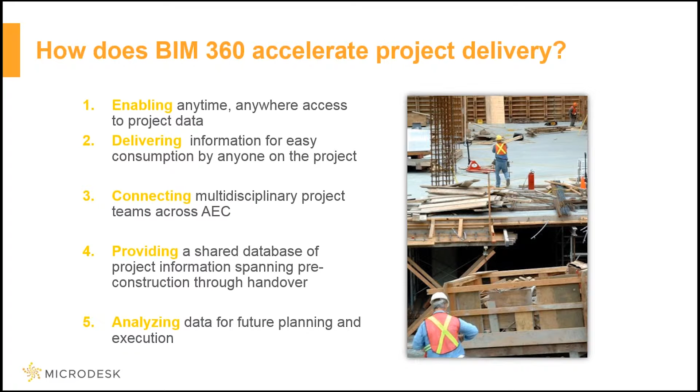It connects all the disciplines, as I just mentioned, as far as your GCs and CMs and so forth, that need to work under one shared platform, which gives you real-time updating and real-time access to the data within the project. It helps you from an analytical perspective because not only are you able to manage the entire construction process for your existing projects, but it also allows you to have that data for future reference. So if the project was successful in your eyes, there's no reason why you can't repeat those practices to help you with future projects.

And by you being able to have one platform in which you can access data, by having everyone access that information in a timely fashion, the real benefits of BIM 360 come from budget and cost. Because what you're going to be able to do is you're going to be able to maintain your budget because you're going to be able to maintain and decrease rework, if you will.

You're going to be able to maximize the uses of your resources, of course, people and equipment and so on, because you're going to be able to locate them in a timely fashion. You'll increase profitability because you're going to minimize overusage, if you will, as far as individuals having to go back and forth from the office and from the trailers.

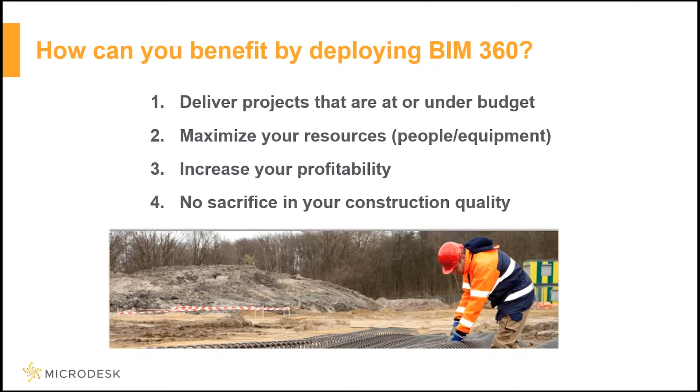Everything will be in real time, so you'll be able to make those decisions a lot more efficiently. And because you're going to be able to do that a lot more efficiently, you're going to increase the quality of your construction. You're not going to sacrifice any quality at all because you're going to be much more efficient in managing that.

So let's talk about risk for a moment, because really what it comes down to is minimizing and reducing risk because of the lack of efficiencies and the lack of connectivity, if you will, of all parties involved in managing that project. What BIM 360 will allow you to do, because of its platform and because of everyone being involved in the process, you are going to increase your capabilities of reducing time to delivery and reducing that risk tremendously.

You're going to have everyone on the same platform, so the reliability of your data is going to be sound. You're going to decrease the cost of your project because you're going to reduce your rework. You're going to reduce waste.

You're going to increase quality because you're going to be able to not only take that information from this project, but you'll also be able to take those practices for other projects moving from the present into the future. You're obviously going to reduce your time, and you're going to increase safety because of the real-time capabilities and real-time access and being able to understand what's really going on in the field.

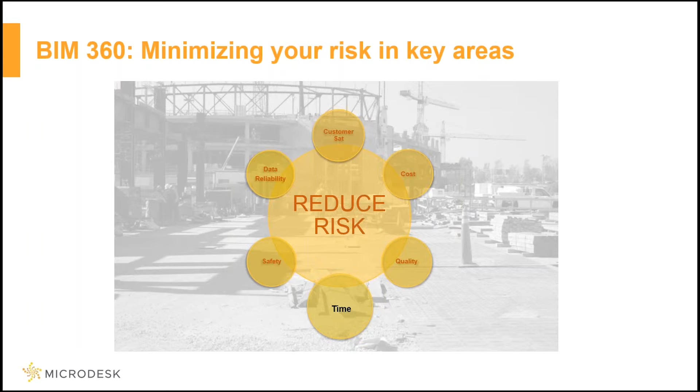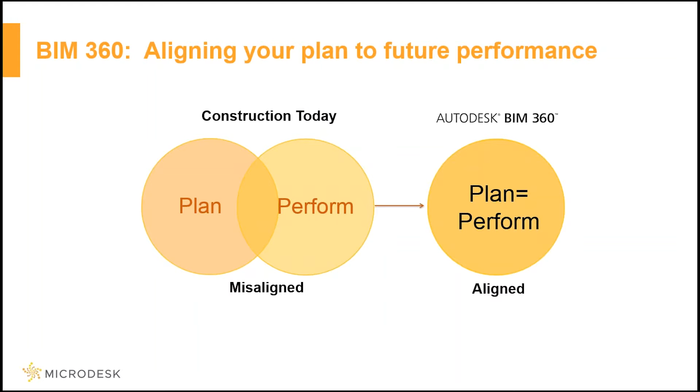So what BIM 360 does is it actually allows you, because of its platform, to take what's being planned versus what's actually happening in the field and help align those two major aspects, for a much higher quality product, a much more efficient usage of the budget, and of course maximizing your profit in completing that job.

And just to reiterate, the anytime, anywhere access of BIM 360, given the fact that it's a cloud-based solution, allows all participants to access via laptop or mobile device, depending on your modules, even an iPad. It gives you access to the data you need, delivered to the right person at the right time, without them having to search for what they need to be working on.

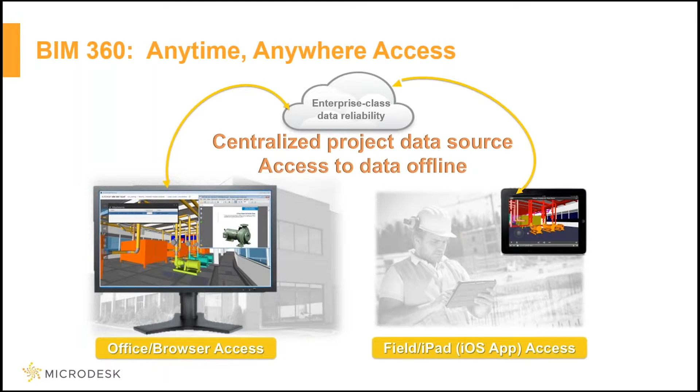So briefly, overall, BIM 360 spans the entire building life cycle, from pre-construction using BIM 360 Docs, our most recent module, allowing you to store and manage all 2D, 3D, and other documents involved within that project.

BIM 360 Glue, which we're going to focus on today, is our BIM management and collaboration module.

BIM 360 Plan pertains to production scheduling, lean scheduling for crews who need that 1 to 2 and 3 week look ahead, so they can be much more efficient in planning. BIM 360 Field helps you in measuring and managing all issues occurring in the field.

And then Building Ops, from a commissioning perspective. Once information is collected from the field and brought into Building Ops, your facilities managers or owners are able to manage that facility from day one.

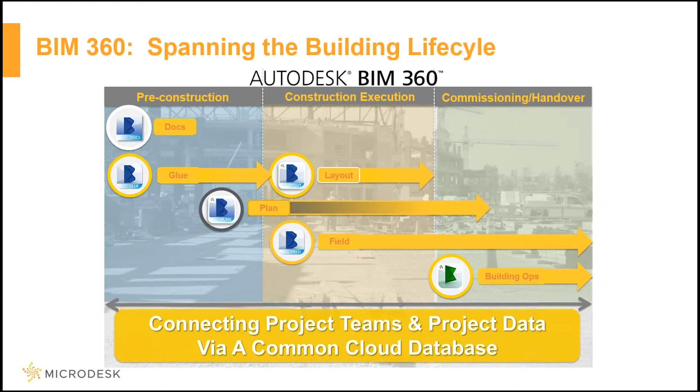So let's talk a little bit about BIM 360 Glue. I'll be quick here, and again we apologize for our late start. BIM 360 Glue is our module that helps you increase collaboration, communication, and clash detection, so everyone knows what models they need to work on, what are the most up-to-date models, and that collaborative issue of sharing files and emails going back and forth will go away using BIM 360 Glue.

Typically, in the coordination process, you have a BIM manager and your different MEP, design, and structural teams all coordinating with their models, trying to do clash detection, trying to merge models to curtail issues before building. The problem is that when you're not on a single platform, you're getting information in different formats, through different infrastructures such as email, FTP sites, whatever the case might be. So you're really at risk of not using the proper models for the proper analysis and getting it to the proper person.

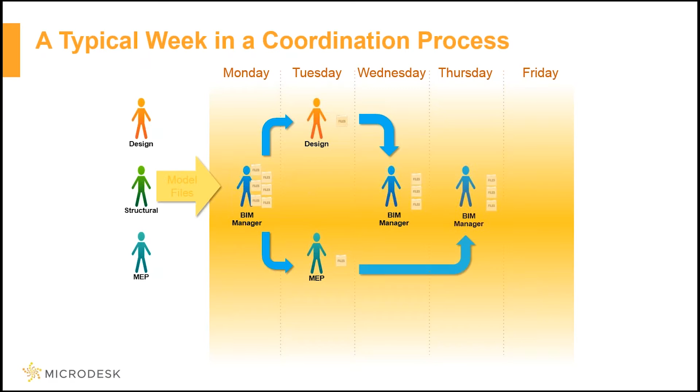BIM 360 removes that bottleneck because there is no searching — everyone is accessing the same environment, the same platform. So even if you only saved one day of coordination... instead of going all the way through the week and then on Friday finding you have a thousand issues, in this environment you know what's going on as it occurs. There's no waiting to see what models you need to work on, where the issues are, where the clash detection issues are, and so forth. This removes a lot of that risk and a lot of that uncertainty.

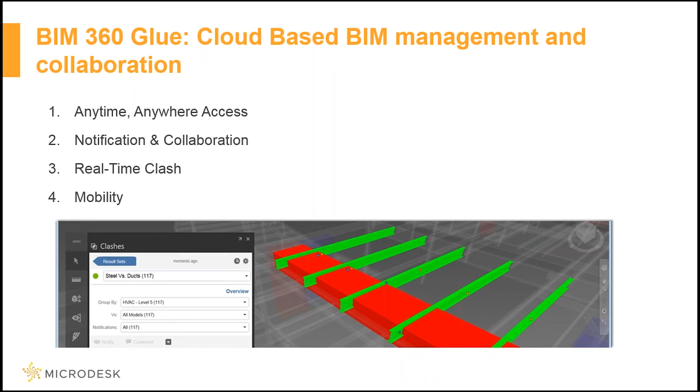So just to summarize, two more slides here — just to make sure you know that you'll be able to access BIM 360 Glue anytime, anywhere, on a mobile device or your laptop. It will also give you notifications on things you need to work on, and that collaborative effort so you'll know who's done what, what decisions you need to make. It will show real-time clash detection on those models, and it gives you mobility capabilities, being able to access information on the device you're working on.

BIM 360 Glue will extend your team and give them one-click BIM collaboration anywhere, being able to access information on your mobile device. It clearly accelerates coordination because there's no emailing, no phone calling — you can simply access the information via the cloud. And most importantly, it connects the model with the field data, so what's really being planned versus what's going on, and what needs to be changed, can be done by clicking within BIM 360 Glue, showing what needs to be done so individuals who need to make changes can do so.